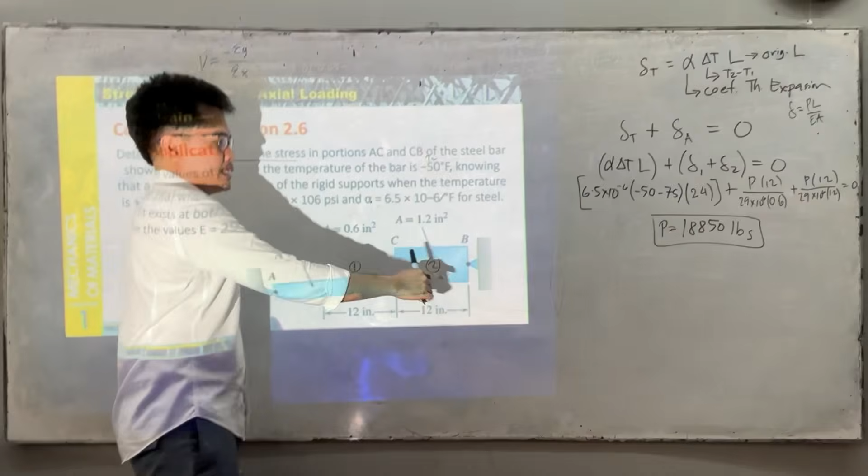This is Sir Gina AJ, and welcome to Chapter 2 of Strength of Materials, Stress and Strain Axial Loading Part 3 of 8. Problems involving temperature changes.

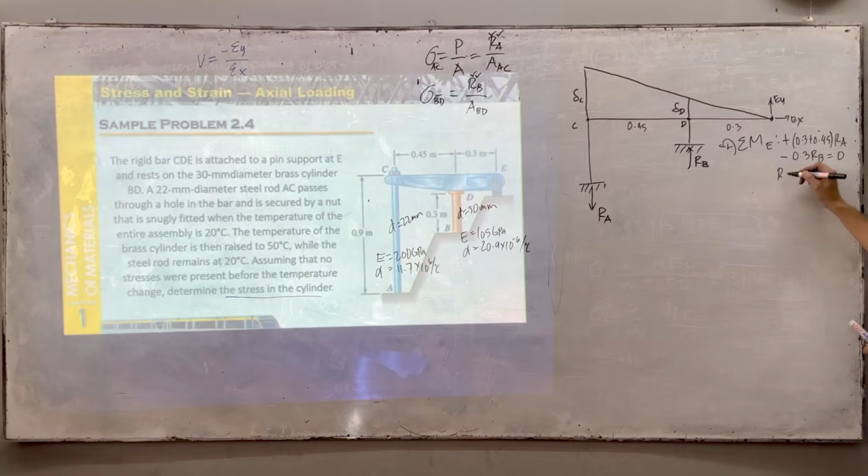So, we have RA is positive, no? Positive 0.3 plus 0.45 RA. Then, this one, negative, no? Negative 0.3 RB is equal to 0. So, therefore, RA is how much RB? Pwede pa calculate? 0.4. So, we have this relationship. Okay? O, sige. Proceed na tayo.

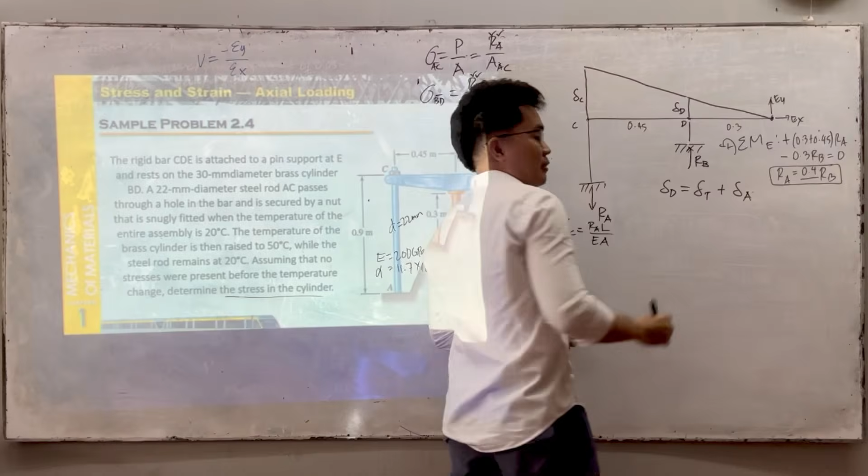Okay? Tama? O sige, solve natin. Meron na tayong equation na to. Now, let's find the relationship between delta C and delta D. Ano yung relationship nila? Makikita nyo similar triangles to, di ba? So pwede tayo magamit ng similar triangles. Delta C over this length 0.45 plus 0.3 is equal to delta D over 0.3. Tama? So therefore, delta D is equal to how much delta C?

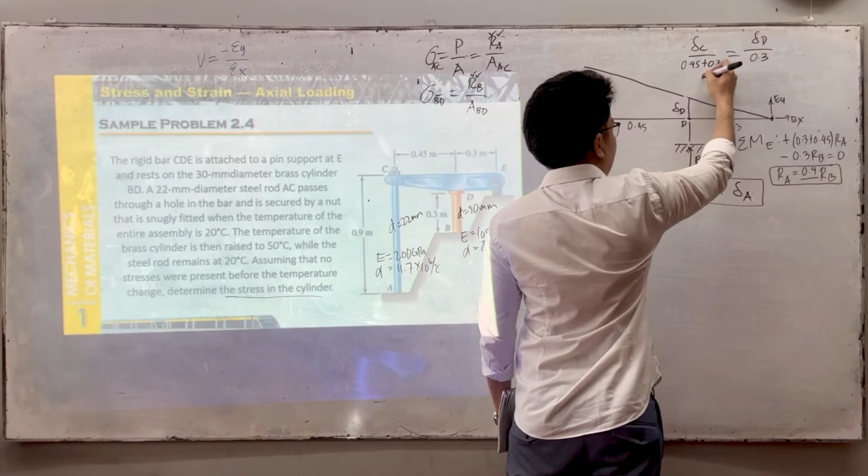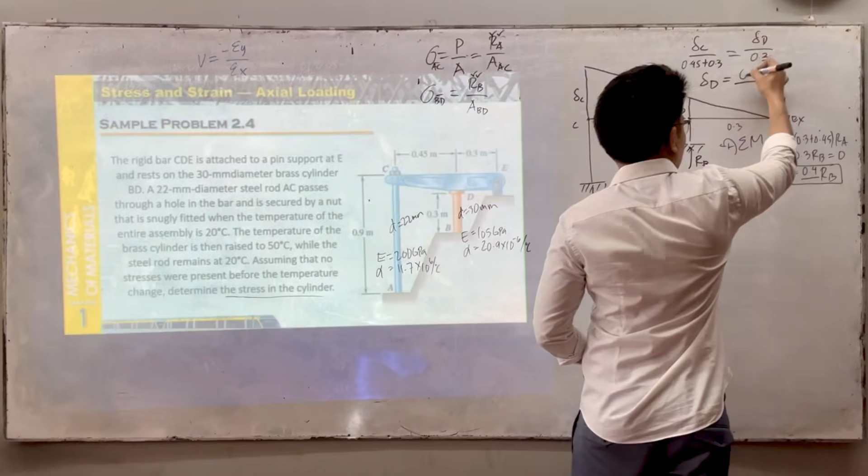Solve daw. 0.4? Okay, we have 0.4. So ayan. Pwede nating substitute dito, di ba? We have, yung delta D natin is 0.4 delta C, is equal to ano yung formula dito? We have alpha delta T L. Plus ano naman to? Ito, axial to, no? So yung axial natin is RB L over EA. Klaro? Sige, substitute pa natin, expand natin to.

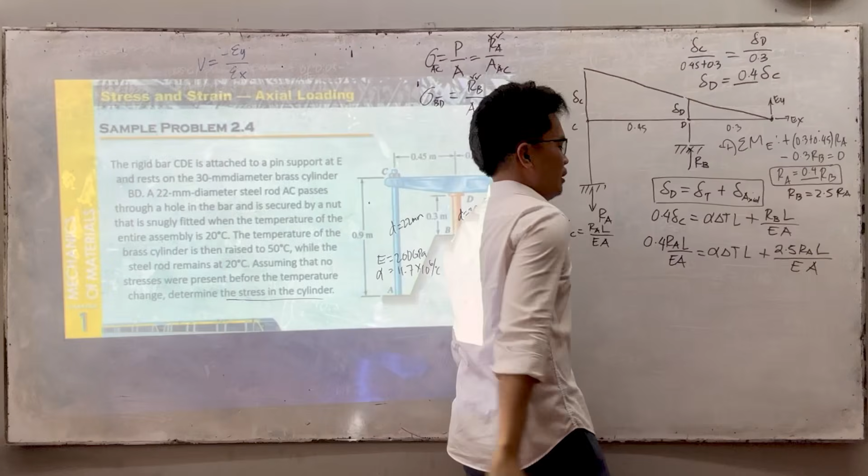Ano yung delta C natin? Delta C natin is this one. So, substitute natin, 0.4 RA L over EA is equal to alpha delta T L plus, ano naman yung RB natin? 1 divided by 0.4, 2.5. RB is equal to 2.5 RA. So, we have 2.5 RA times L divided by EA. So this one here is for the brass, this one here is for the steel. So try natin, substitute.

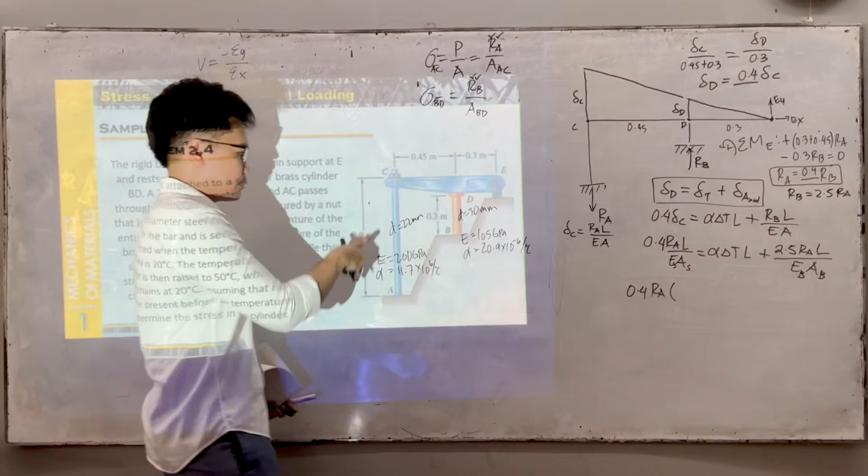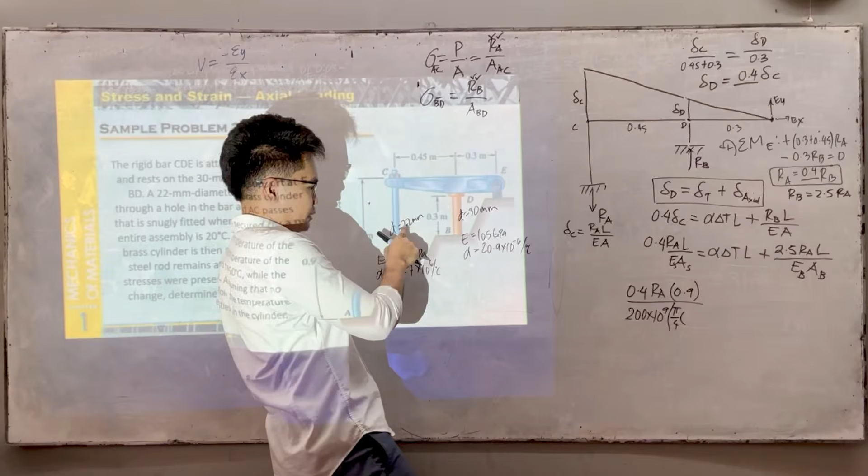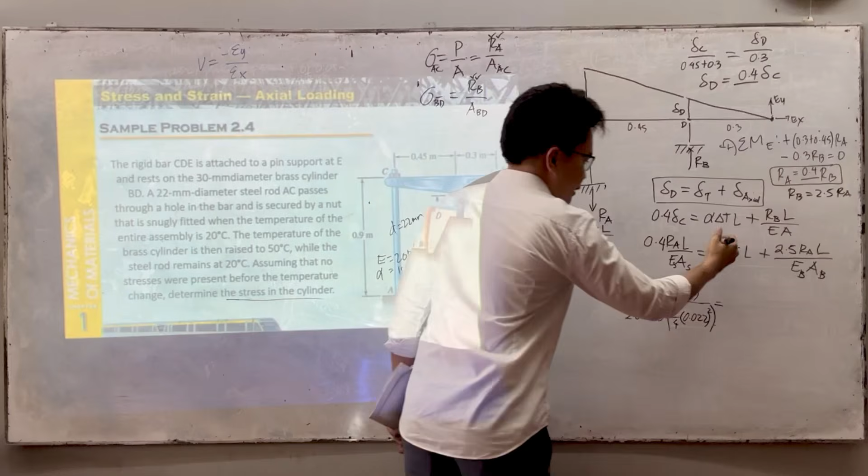So we have 0.4 RA, yan yung hinahanap, no? Times, ano yung original length? 0.9, divided by yung E sa steel is 200. We have 200 times 10 to the 9 times, ano naman yung cross-sectional area? Pi over 4 times the diameter, which is 0.022 squared. Is equal to, ano naman yung alpha? Ito siya is alpha sa brass. Alpha sa brass is 20.9.

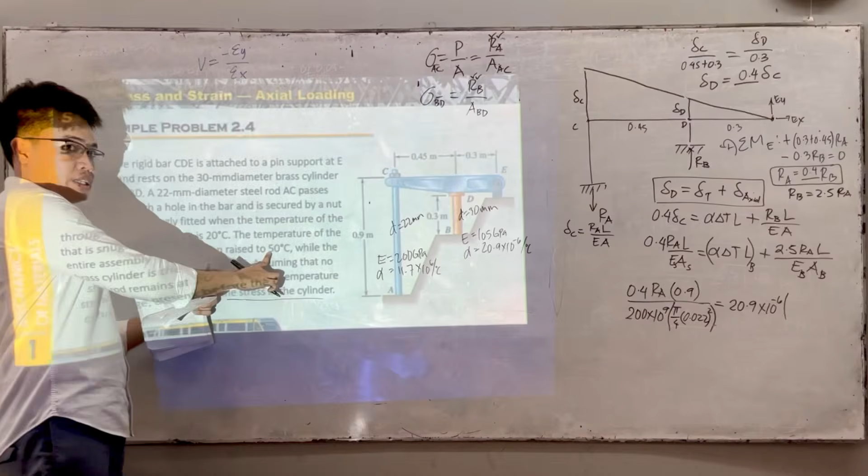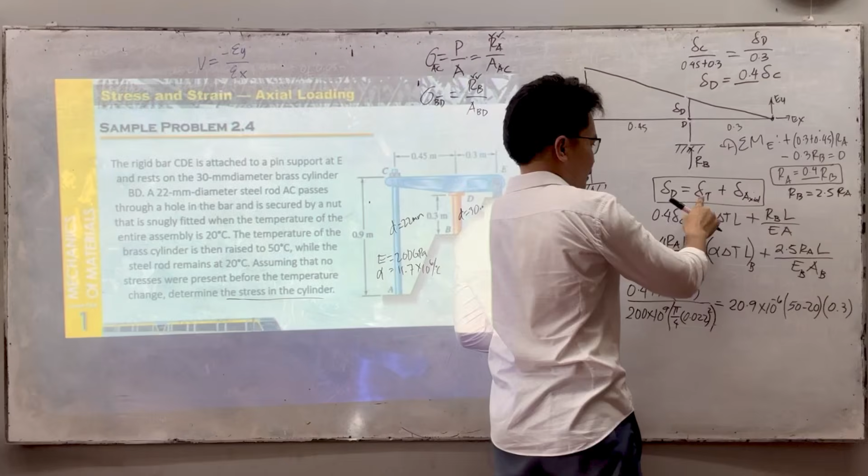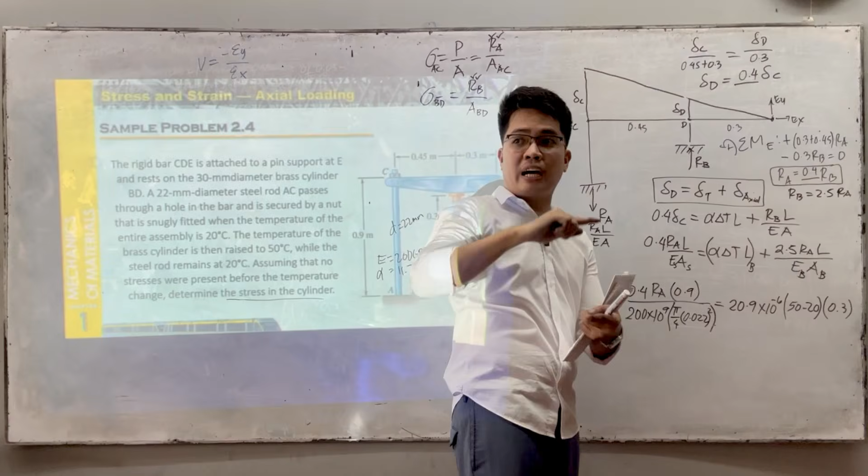So we have 20.9 times 10 to the negative 6 times, ano yung change in temperature? From 20 to 50. So we have 50 minus 20 times the original length, 0.3. Tama? Now take note, nagdagdag tayo ng length kasi nag-expand. Now, how about yung compression? Compression meaning, nag-decrease tayo ng length. So, yung RB natin dito is negative kasi compression. So, this becomes minus.

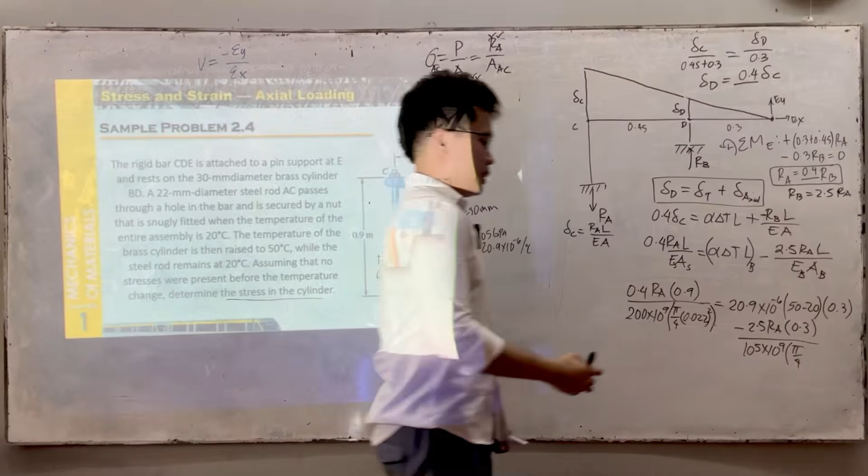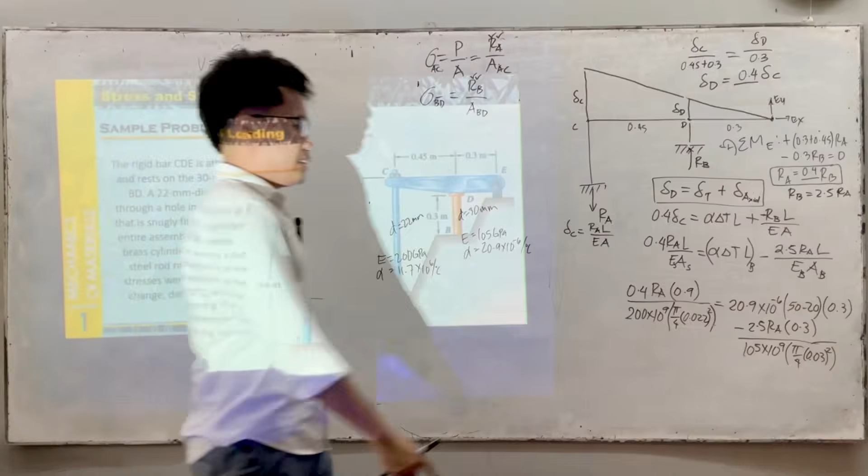2.5 RA times original length 0.3 divided by, ano yung E? 105 times 10 to the 9. And then yung cross-sectional area, we have pi over 4 times the diameter 0.03 squared. So ano yung masasolve natin dito? Our RA. Pwede nyo pa-solve? Ano yung RA? 12.67.

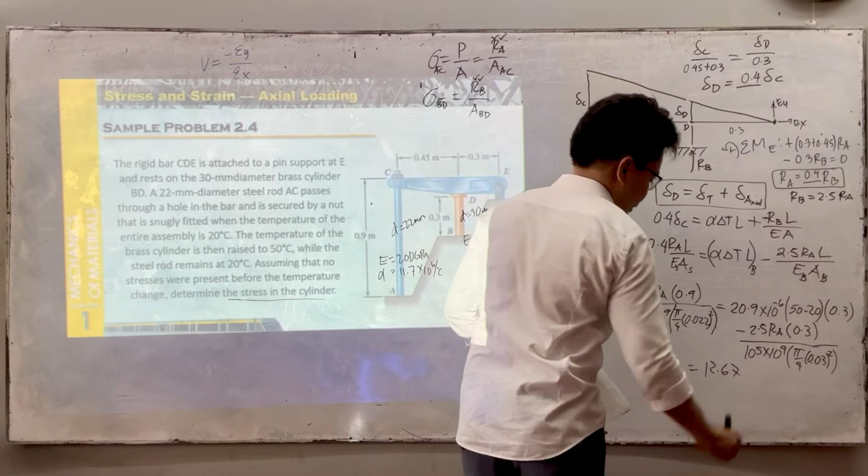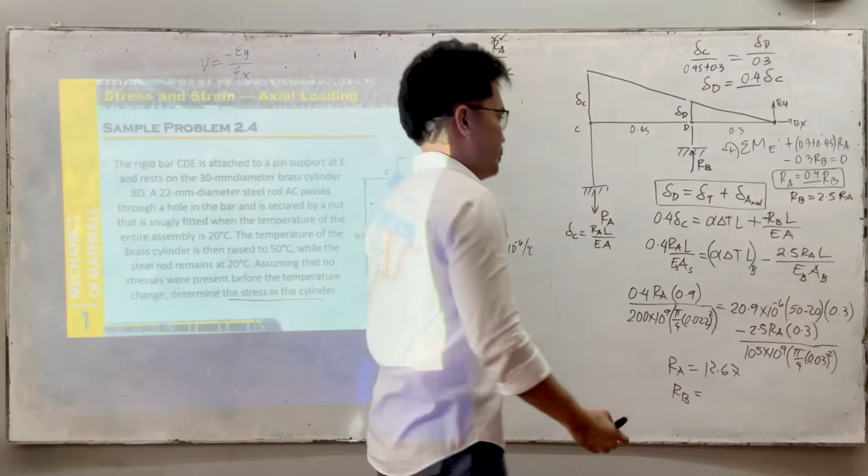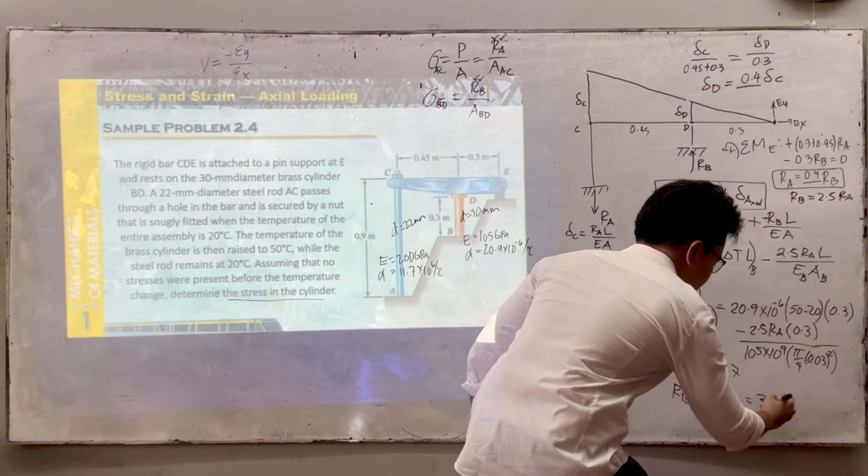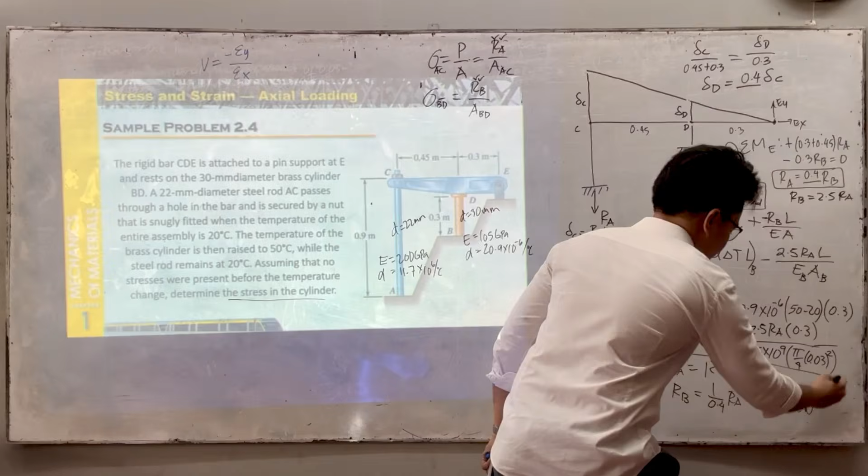So therefore, ano yung RB natin? Divide lang natin by 0.4. RB is 1 over 0.4 times RA, which is 31.67. So ito yung meron sa book, 68. So this is in kilonewtons. So hindi pa tayo tapos dyan kasi yung hinahanap sa problem is stress. So substitute lang natin dito. Paki-calculate daw.

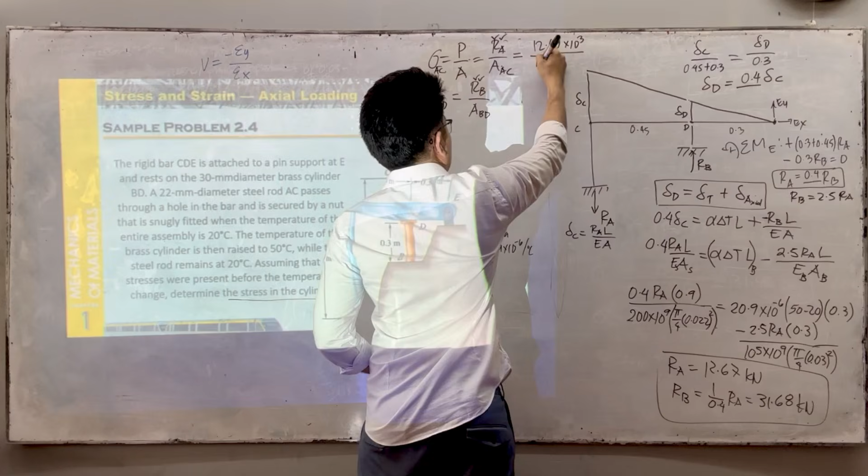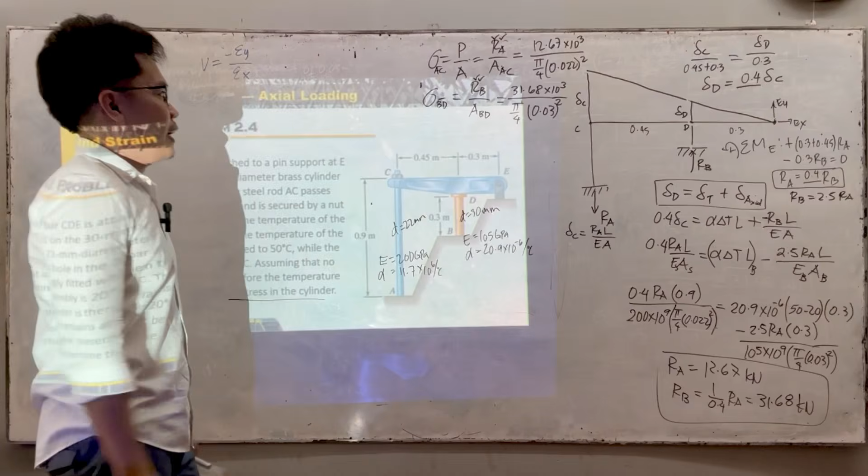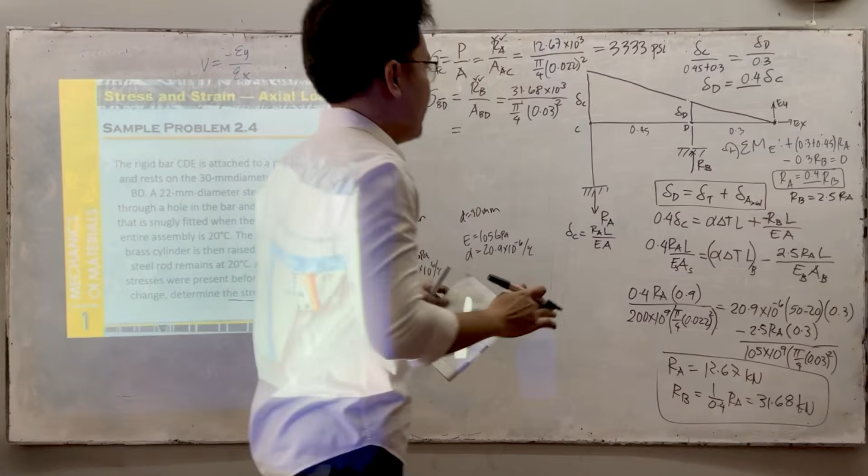12.67 times 10 to the 3 divided by the area which is pi over 4 times the diameter, 0.022 squared. Ito naman, we have 31.68 times 10 to the 3 divided by pi over 4 times the diameter, 0.03 squared. So ano yung sigma AC? 33.33. This is MPa. How about this one? Pwede pa calcu?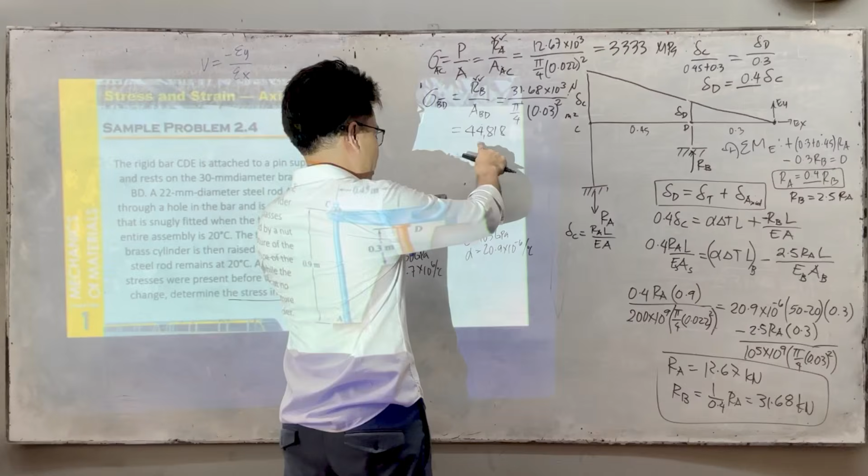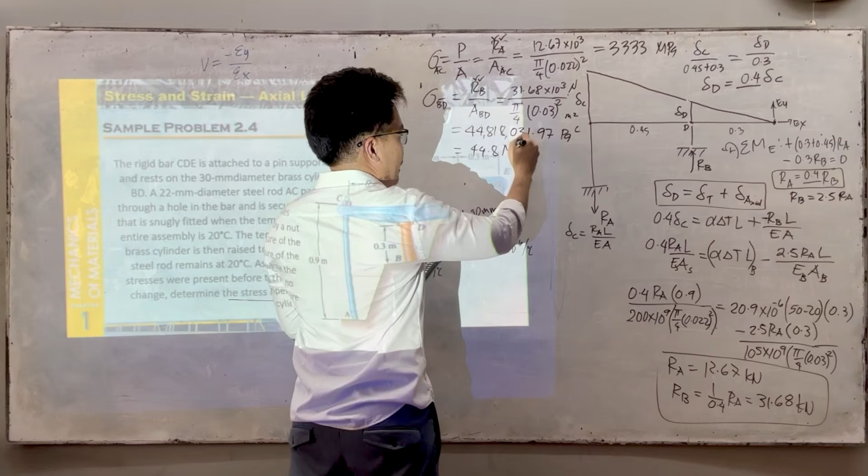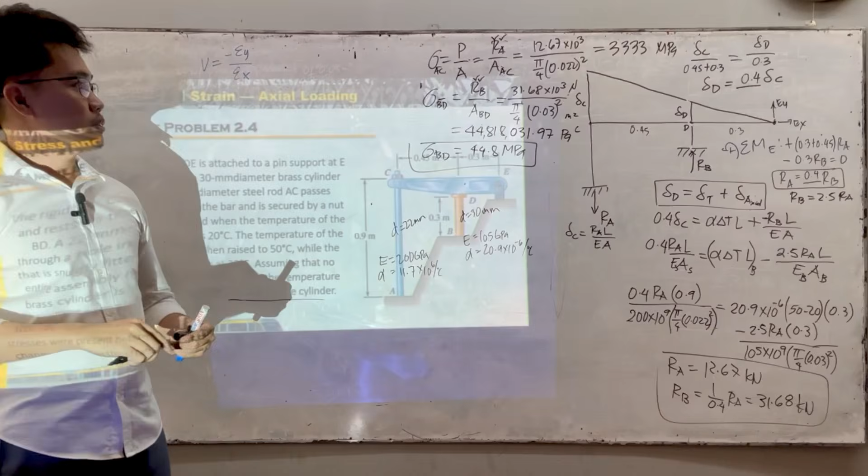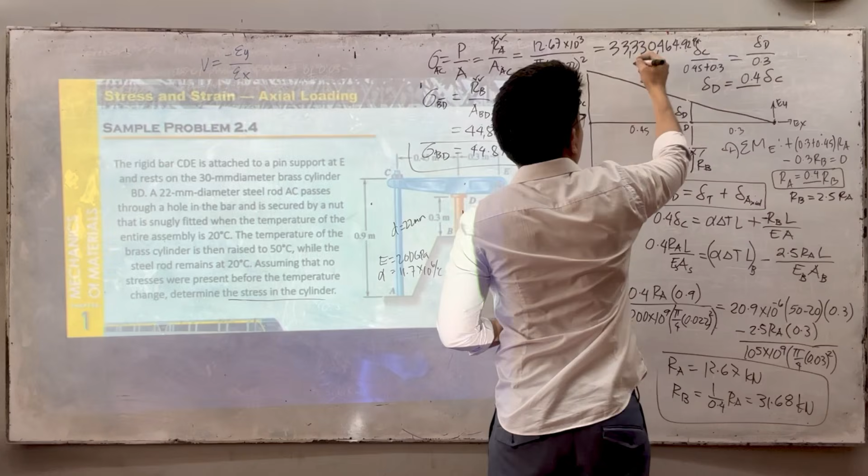44,818,031.97 Pascal. So that is equal to 44.8 megapascal. So ito yung sigma BD. How about yung sa taas? 3333 lang? 0.94. So yung unit dito is Pascal. So kung gawin nating mega, yung sagot dito, 33.33 megapascal. Agoy, di pa kabalo mag-calcu. So may tanong?